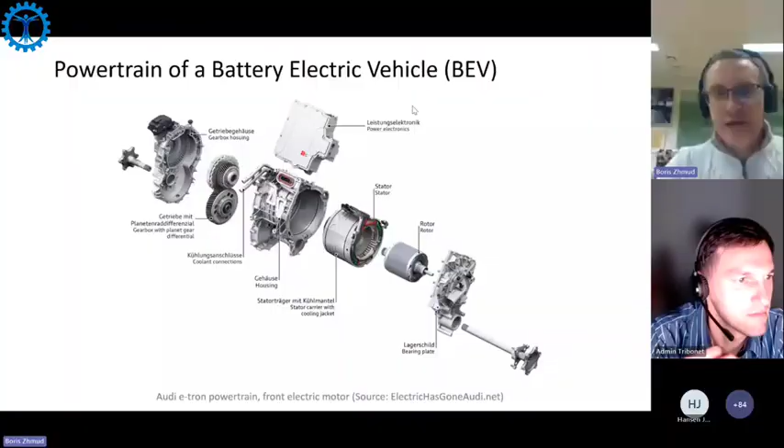When it comes to changes in tribology, tribology is all about loads and speeds and material combinations. You will discover that you have some significant differences. For example, the torque curve for internal combustion engine is dramatically different from the torque curve for an electric motor. For electric motor, you will see usually an area which is called constant torque - you get instant torque already at very low RPM as soon as you start. And basically why it's constant, is because if you make it higher, you will get uncontrolled wheel spin. So very often this constant torque is determined by traction between wheel and ground.

And then you have an area which is called constant power area. In internal combustion engine, the torque curve is always different - it usually will pick up torque, especially if you have turbocharged engines and so on. It would reach maximum, depending on engine configuration, between 2 to 5,000 RPM, and then it would slowly decay after that.

High speeds are used primarily for cost and weight consideration, because you can get a small motor delivering high power. Just imagine a Dremel rotary tool, which can deliver 20,000 RPM. So electric motors can work at very high speed and deliver high power density. Such motors are easier and cheaper to build, requiring less material, and can weigh just 15 kilograms while delivering very impressive torque and power rating.

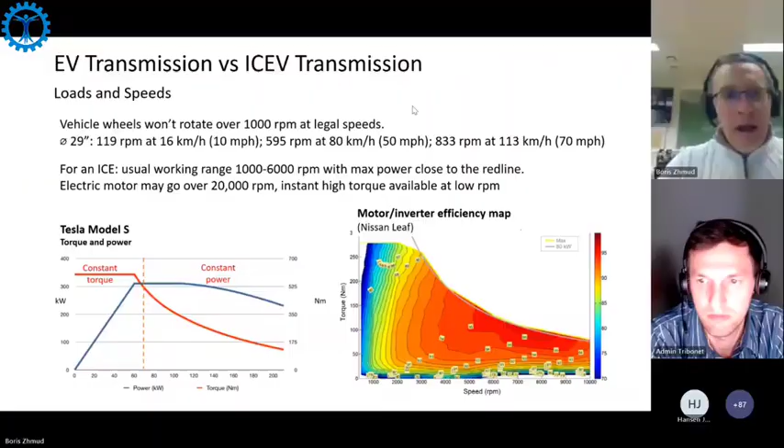It would be very easy to develop such a system if you had only one design. For example, if you used only one-speed e-drive, as initially popularized in different magazines, just a reduction gearbox, and everyone used the same. But that's not how engineering works. You always have a lot of competing concepts, a lot of different hardware solutions, and sometimes people say, okay, we need no clutch.

But if you look at multi-speed gearboxes, they are already in operation. German premium cars use ZF 2-speed transmissions. A year ago, they released 3-speed electric transmissions for passenger cars. In heavy-duty applications, you already have 4-speed transmissions.

If you look back in history, you'll discover that the first automatic transmission came with just 3 speeds. So basically where we are now with electric transmissions looks like the situation with automatic transmissions some 40 years ago. And you'll also know that today automatic transmissions very often have 9 to 10 speeds. So basically we're moving in this direction.

We also have, of course, CVT type transmissions and so on. So basically it's a very broad range of hardware which needs to be addressed. And when you have such a broad range of hardware, there's no universal recipe for how to optimize efficiency, because it's different for each individual design.

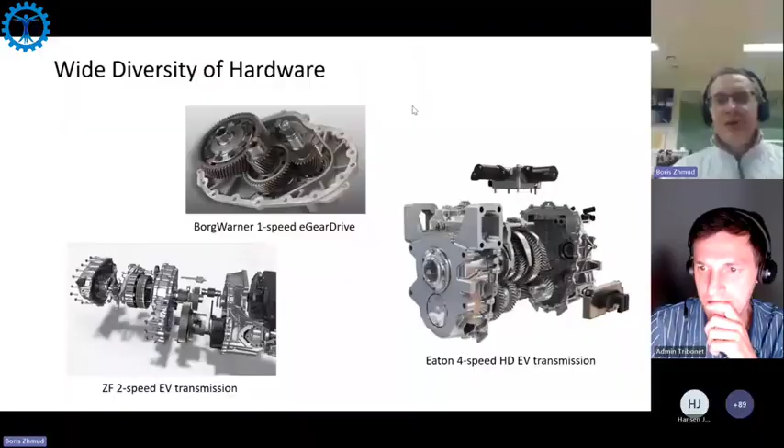When it comes to tribological problems, everything boils down basically to 3 major components: gear tribology, bearings—because gears sit on shafts, and shafts are mounted to housing with bearings—and seals. This is basically the same as it was in traditional transmission design, as it was in automatic transmissions and so on.

Then we add something new: insulating materials, because now we talk about electric motors, high voltage alternating current, and when you get high voltage you always have risk for discharges. You're basically getting close to conditions for dielectric barrier discharge. You can get some very interesting phenomena which are described by plasma chemistry in electrical units.

Those phenomena will affect insulating materials, and those phenomena will also affect transmission fluids. You get a lot of formation of free radicals, you might get some electrochemical reactions, you may get formation of minute quantities of ozone, which is extremely active towards elastomers and so on. But again, tribologically wise, we'll speak about gear tribology, bearings, and seals.

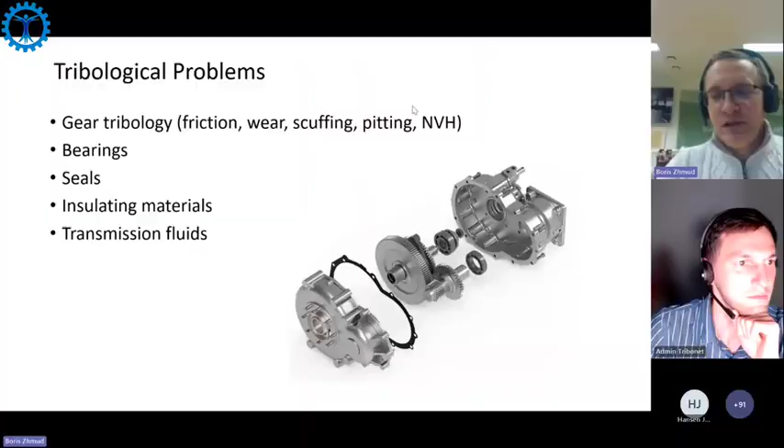For EV bearings, as I said, the biggest difference from orthodox knowledge formed over maybe 200 years before electric vehicles arrived is parasitic currents. Because now, due to shaft voltage, due to the voltage difference between the motor shaft and the frame, you get parasitic discharges. You get a phenomenon called electrically induced bearing damage, or electric polishing, and bearings may be damaged—in fact, severely damaged, which would require total change of the motor.

So to address the electrical damage problem, there are some remedies. The most straightforward one is just to improve bearing insulation.

Either you want current not to go through the bearing, or you want to direct current around the bearing if you cannot just stop it. So you can use, for example, hybrid bearings, which use ceramic elements, ceramic balls, and so on. You can use shaft grounding. In this case, you will just redirect electric current from the bearing to the ground.

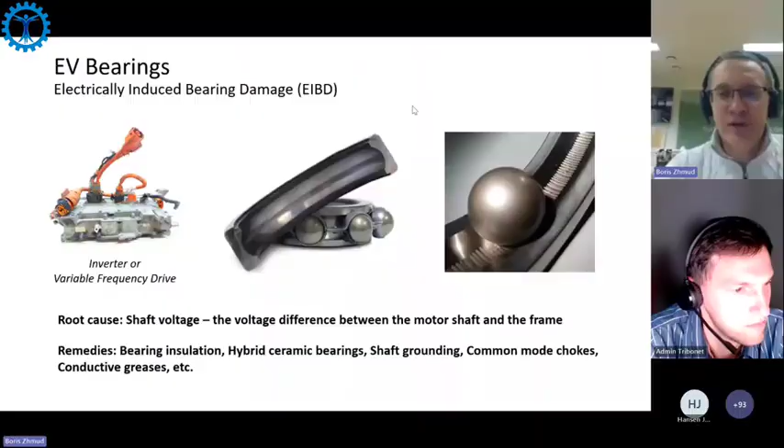You can use, I would say, some electromechanical things like common mode chokes. It's basically you just try to filter parasitic signals. You can use conductive greases and so on.

So when it comes to the seals, actually a lot of problems are totally identical to what you get in conventional vehicles, because many elements in electric vehicles are actually the same as in conventional vehicles when it comes, for example, to chassis and to hydraulic actuators and so on.

But some components are very unique, and unique is a requirement for rapid rotary seals. Electric motor usually runs dry, and it needs to be somehow isolated from the gearbox, which is lubricated by automatic transmission fluid. In this case, you would need some seal in between, and you would require that this seal withstand very high surface speeds, up to 50 meters per second.

It's actually an abnormal speed for some seals, and it requires low friction, because if it has high friction, it will heat so much that it will just melt. So many standard materials will not work. Luckily, we have some material development based on composite, PTFE, copper seals. You have Teflon seals and so on, which work in these conditions.

Then it's also required to have chemical and thermal stability. Because of high power density, you will have heating. So we don't have combustion, but we still have a lot of heat actually in the electric motor and also in electric transmission. Seals are supposed to survive this broad range of operating conditions, from negative temperatures when you start the vehicle in winter to very high temperatures, maybe up to 150 degrees when you run at full power on the highway.

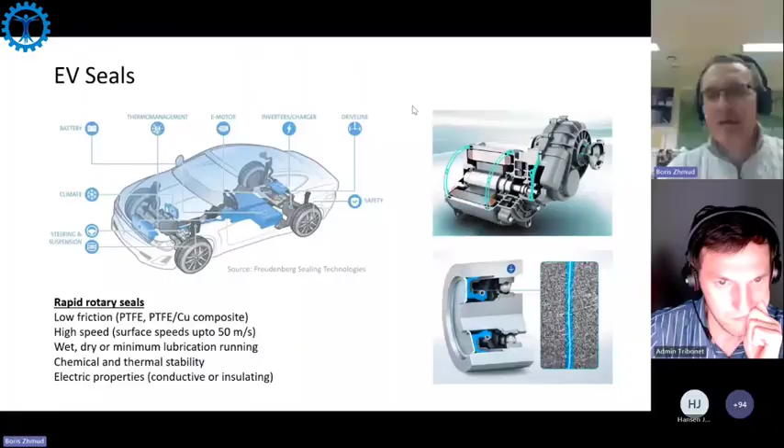Transmission fluids are an inherent component of any kind of EV transmission. Again, you can name some differences versus conventional vehicles, but then the question is, what is really conventional? You know that on the conventional vehicle side, you have over 100 individual OEM specifications for automatic transmission fluids. No mistake, over 100. So you have a handful of products with multi-vehicle approvals. One product can probably match up to 50, maybe different specifications.

It's always a matter of compromise. When you develop a multi-vehicle product, it's not particularly good for each individual design, but it's good enough for a broad range of designs, which may make it extremely easy to deploy.

So you talk about higher input shaft speeds, and again, this is not unknown in past experience. For example, if you look at speeds for older generation Formula One cars, which run up to 20,000 RPM, or some motorcycles and so on, you have actually classical designs with very high input shaft speeds.

You have high torques in classical cars. For example, Koenigsegg developed up to 1,000 Newton meter torque. So you had also alternating stresses in racing applications, drag racing, and so on.

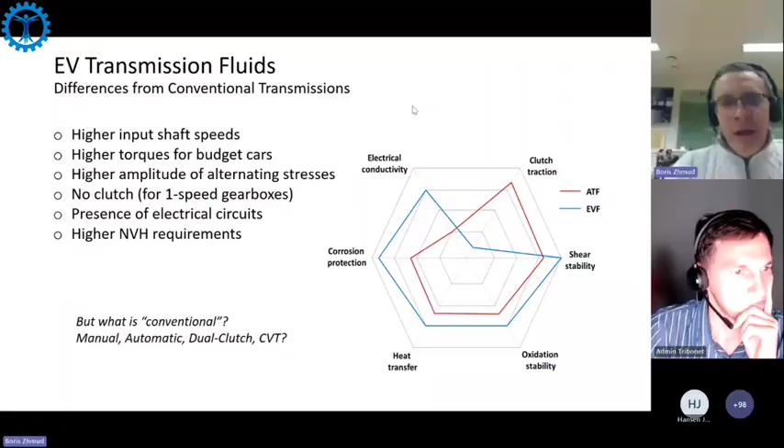Can you use conventional transmission fluids in EV transmissions? Actually, not only you can, but you do. You would be surprised to hear at each conference you attend, people talk about unique fluids for EV transmissions. But actually, if you look at factory fill, nearly all vehicles on the market use standard transmission fluids for EV transmissions.

Here is a table taken from Infineum, so people know what they're talking about, and you can see no matter what kind of transmission you have, CVT, DCT, reduction transmission, you still use conventional ATF fluids. Dexron 6, for example, is used in Tesla, and so on.

So basically, when we talk about uniqueness of EV transmission fluids, it's kind of a cat and mouse development game. Why do people use conventional transmission fluids? Because when you, as a transmission designer, design your transmission, you need to take a fluid which is available on the market. You cannot basically develop your transmission with some hypothetical fluid in mind. And you cannot ever be sure that someone will be able to formulate a fluid with the requirements you want, because that's a totally different art from formulation, and I would say just dreams of an engineer.

So you use a standard transmission fluid, Dexron, Mercon, or whatever. You develop the transmission, and it happens that your transmission works very well with this fluid. So then the uniqueness of EV transmission fluid is actually developing something which will be multi-vehicle. You can see some newcomers, for example, from Afton, which develop fluid that covers multiple applications. But as I say, it's the same

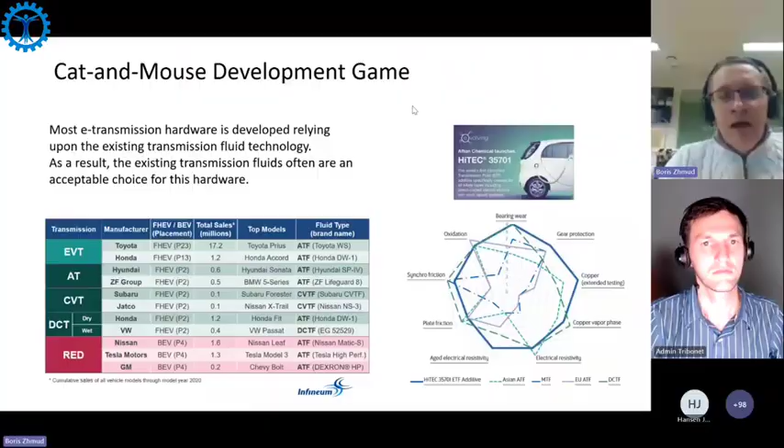A little bit about requirements for gears. We talk about improving quality all the time, continuous development, and you have seen how the quality of automatic transmissions has changed over the years. If you go to exhibitions and see those shiny boxes, they look very, very impressive.

When it comes to EV transmissions, you talk about usually tight dimensional tolerances, and this is done because of requirements for noise reduction. So you want to minimize transmission error. Usually we'll talk about either accuracy grade 6 or sometimes even better. Sometimes we go even to grade 5 for high performance vehicles.

The ability to withstand rated torque - you talk about pretty high torques in EV applications for regular on-road vehicles. In the past, anything which delivered over 400 Newton meters would be considered a power performance vehicle, but now, more or less each electric vehicle will deliver you over 400 Newton meters in torque.

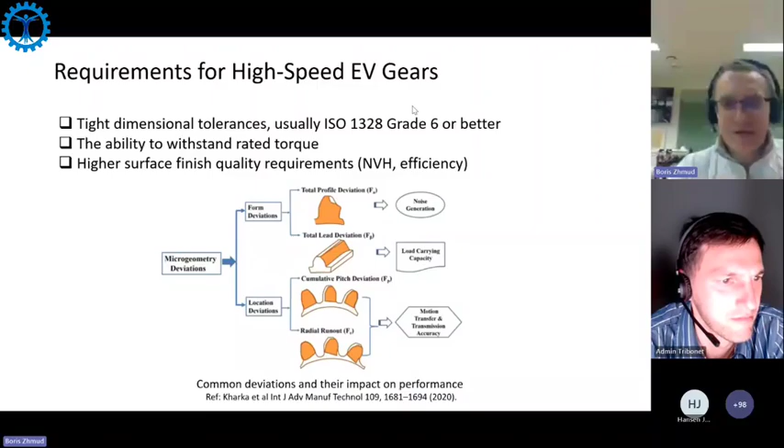And higher surface finish requirements, because when you go to higher tolerances, you would also like to improve surface finish. As I say, it's all ways to minimize transmission error.

Mass finishing processes is one of the processes getting increased interest when it comes to application in high-speed electric transmissions. Our company in Sweden, TriboNet, we work with developing a very special mechano-chemical process, which is used for enhancing the surface. And the unique side of

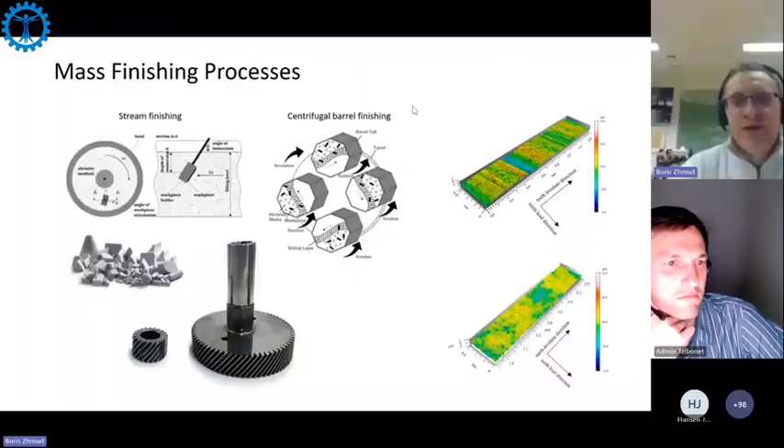the mechano-chemical process is that unlike conventional processes which deal only with surface roughness, we have a triad of effects. Instead of one effect related to surface roughness, we have 3 different effects playing together. We modify surface roughness profile, we generate compressive stresses, and we provide tribofilm priming. And this has a pretty significant difference for performance, because when you have tribofilm priming, you automatically improve scuffing resistance.

And scuffing resistance is very important if you want to deploy transmission fluids with a low level of anti-scuffing additives. Think about low sulfur content. For example, if you would use dual clutch transmission fluid, it usually has 0.2% sulfur versus 2% in GL5 lubricant.

And then compressive stresses - conventional abrasive processes are very often used to remove compressive stresses from the grinding operation, because gear grinding also produces compressive stresses. But in mechano-chemical finishing, we actually generate compressive stresses too, just with a different tensor, which would improve performance in terms of rolling fatigue and micro-pitting. So these are the real differences we see from mechano-chemical process compared to conventional mechanical process.

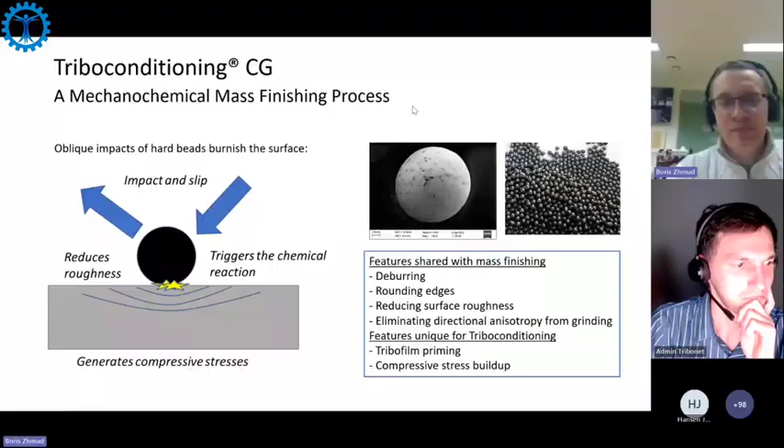The process itself looks to some extent like shot peening, except that we don't have shots - they fly at lower velocity. Basically the surface is bombarded by small ceramic balls, 1 to 3 millimeters, which produce some impact, some burnishing effect, and they also trigger a tribochemical reaction to deposit tribofilm on the surface of the component.

First and foremost effect is on surface roughness and surface waviness. This effect is actually not unique for mechano-chemical finishing - the same effect can be achieved by conventional super finishing, the only difference being that you'd require a multi-step process. We get reduction in amplitude roughness, reduction in gradient roughness - meaning slopes of asperities are reduced - and also some reduction in waviness, which is positive for noise excitation. But again, when it comes to modification of the surface roughness profile, it's not unique to mechano-chemical process. It's a positive side of it, but can be achieved by other means.

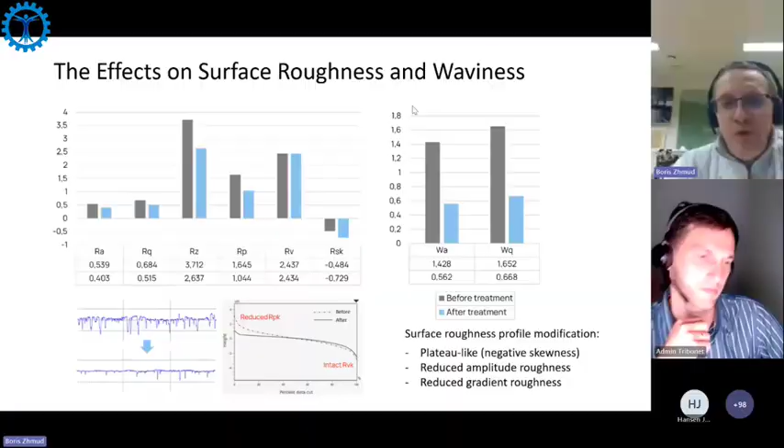What is unique for mechano-chemical process is actually tribofilm priming. And with tribofilm priming, you would usually improve scuffing resistance. I will show it later.

To understand deeper what's going on, we rely on gear tribology simulation. Here I'm lucky to have cooperation with really knowledgeable people from the US and Italy. We work in collaboration with EnginSoft from Italy and Xtrapid from the US. We use different models, from thermal elastohydrodynamic models to more macroscopic meshless simulations of the whole appliance.

What we try to do is build the whole simulation chain, where you bring together experimental results. Experimental results are used to calibrate the digital twin, and digital twin simulations are used to simulate your actual appliance. So we go from basic tests, which are used for calibration of your model. From this calibration, you basically have a lot of parameters which you need to enter - parameters for lubricants, for example.

To find those parameters, they are not part of specifications - you need to get experimental research to find those data. We use those data as fitting parameters for the model. Then we can validate the model by using FZG testing, and after the model is successfully validated, we go to full appliance simulation - we can simulate basically the whole gearbox.

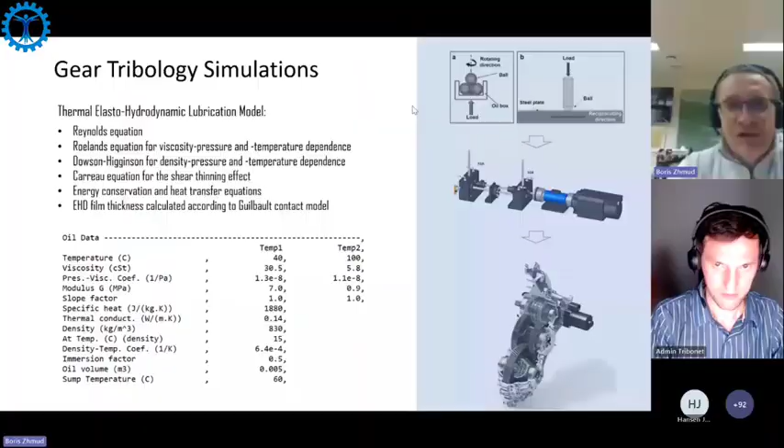So this is just an example of input you provide - very simple spur gears for FZG testing. We produce one gear which is representative of surface roughness of conventional ground gears, roughness 0.3 micron, RZ would be around 3 micron in this case, with very little skewness.

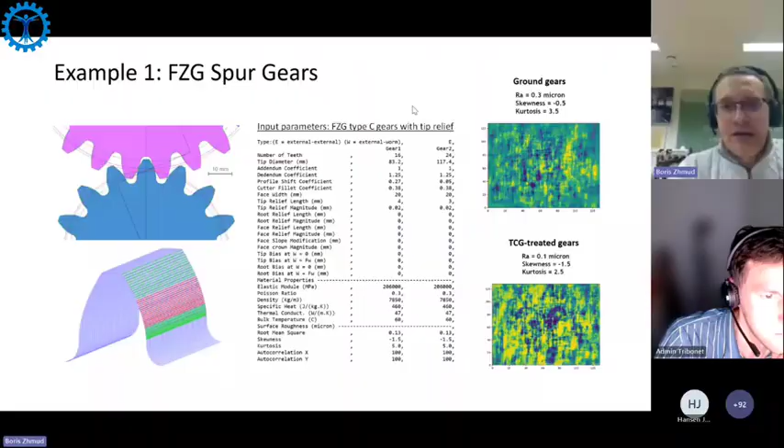Then we go to tribo-conditioned gears. A tribo-conditioned gear is really a gear which is processed by our mechano-chemical process. It has much more negative skewness, meaning the surface is more like a plateau-like surface, and roughness is also decreased. If we look at the results of these two gears in simulation, you discover that friction is getting lower - asperity contact ratio is getting lower when you get mechanochemically finished gears.

So you get overall more robust design - reduction in friction shear, improved lubricant film strength, which means improved efficiency and lower wear. The better the lubricant film integrity, the less wear you're going to experience.

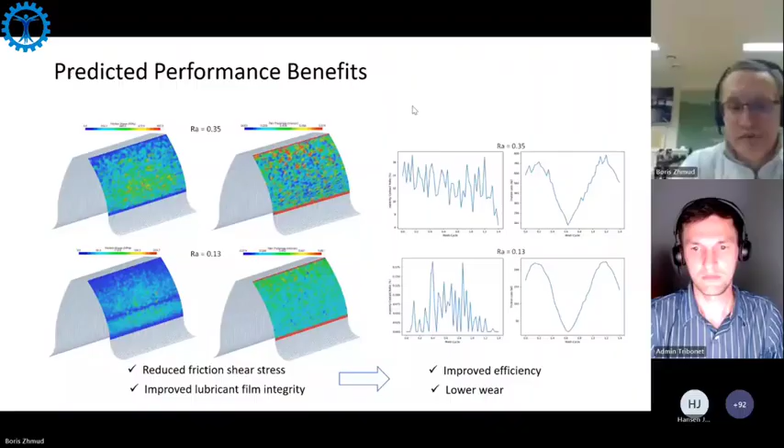We also use more advanced rig tests like FZG tests to look at scuffing resistance, because you always try to downsize components, but you cannot downsize them infinitely. The electric motor is already very small, but if you go, for example, to the gearbox and want to make it light, you'd go for smaller gears - but smaller gears will always be loaded more, and when loaded more, at some point they will suffer scuffing. And when scuffing occurs, you're no longer concerned about efficiency because you have a much bigger problem to address.

Dimensioning of gears is a very important topic, and luckily with modern computer-aided design tools, you can get properly good dimensioning for gears, for bearings, for everything already at the design stage. You develop things which are pretty good from the first trial, but they always require some empirical tweaking.

Empirical tweaking is very often related to heat management, to lubrication, to choice of lubricant, to choice of additivation, and to addressing some long-term endurance issues which may not be discovered instantly but come after one or two years in operation.

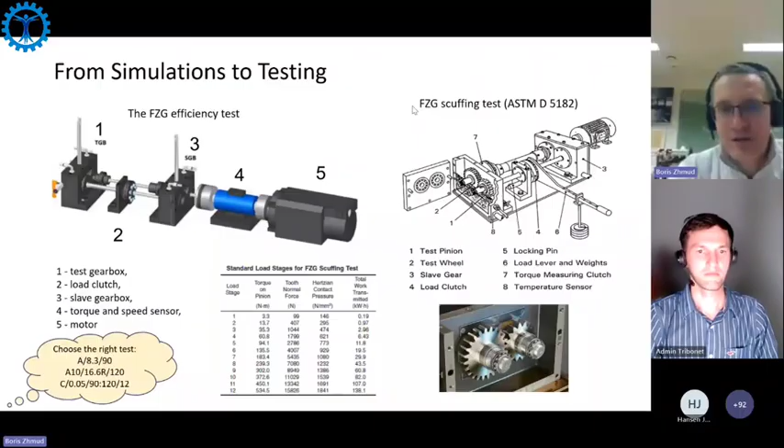So we try to do as much as possible from rig tests to get an idea how one or another type of surface finish will perform in real life application. It's also important to keep in mind there is a broad range of tools. For example, if you visit Munich Technical University, you'll discover they have several dozen different FZG rigs, far beyond the standard center distance of 91.5 — rigs for high speed, low speed, three-shaft testing, and so on.

So what do we see in this type of test? First, a big difference between gears produced by conventional grinding. Even though we talk about conventional grinding, there are already high performance solutions on the market — some Japanese machines for precision gear grinding can deliver accuracy class 5 without honing, without anything. But still, if you look at the performance of gears coming from grinding versus gears which were ground and super-finished, you'll discover two remarkable changes.

First, response to running in, because you can never develop fully conformal running-in of components during manufacture — you can only deliver some degree of approximation. It turns out that gears which are super-finished are much closer to running condition than gears which are just ground.

If you look at data showing efficiency versus pitch line velocity for ground gears and super-finished gears, you'll see that the improvement in efficiency due to running-in is bigger for ground gears than for super-finished gears. For a super-finished gear, efficiency after running-in versus before is almost unchanged. For ground gears, efficiency significantly increases after the running-in process.

It's also important to keep in mind the overall difference in efficiency after running-in — for example, take efficiency at 8.3 meters per second. You can see efficiency after running-in is always higher for super-finished gears than for ground gears. So there's a positive effect of super-finishing on the running-in process, which is remarkable for many reasons: you generate less particulate matter, less debris into the lubricant, the lubricant stays in good condition longer, and you also get efficiency improvement over the lifetime of the component.

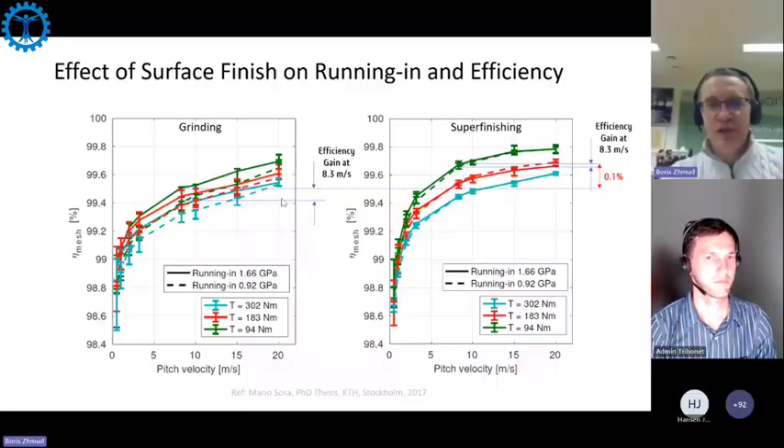So what is the difference with mechano-chemical finishing? We still basically get the same efficiency improvement as from super-finishing, or sometimes a little bit better. So what's the big difference? As I said, mechano-chemical finishing leads to improvement in scuffing performance due to tribofilm priming.

On this graph I'll show scuffing performance of two different finishes with two different lubricants. One lubricant is a fully formulated axle lubricant with GL5, API GL5 specification, which will go all the way up to loading stage 14 without failure. On the right-hand side, the dark gray area shows super-finished surfaces. On the left-hand side, you see how conventional ground surfaces behave.

If you go to additive-free oil — the low pillars refer to additive-free oil with no sulfur whatsoever — it will fail at the same load stage, stage 5, no matter if you have ground gears or super-finished gears. Whether ground or super-finished, they all fail at stage 5. For fully additivated GL5 oil, they all pass stage 14 without failure.

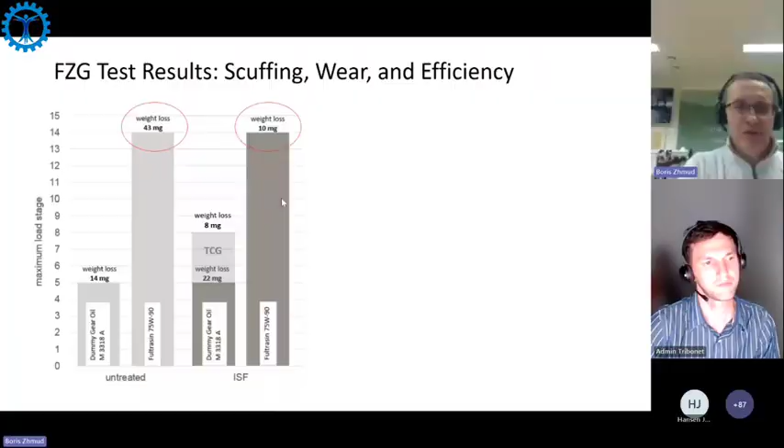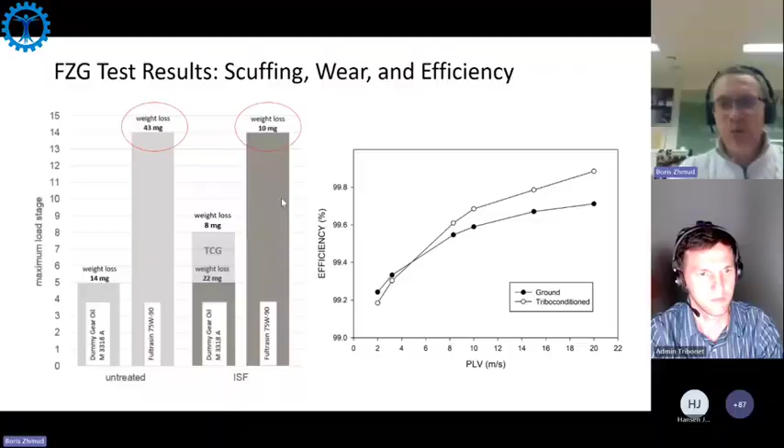So what is the advantage of mechano-chemical finishing? With mechano-chemical finishing, you actually get a higher failure stage already with oil that has no additive. So mechano-chemical finishing essentially brings some elements of running-in into the manufacturing stage, making the gear more resistant to scuffing than a gear that was just super-finished, when there's no anti-scuff additive in the lubricant. Efficiency-wise, mechano-chemically finished and super-finished gears have comparable performance improvement — sometimes mechano-chemically finished gears give a slight improvement over conventional super-finishing.

Another important factor is the influence of lubricant, and this is a topic I really love because it relates closely to my past in lubricant development.

In this particular study, we compared different viscosity grades, but not only different viscosity grades, also different base oil compositions. We moved from group 2, hydrotreated API group 2 base oil, to fully synthetic polyalpha-olefin based. As you can guess from viscosity, 3.5 is actually Exxon base oil. What was used in this case is fully PAO based.

You will see that with fully synthetic lubricant and lower viscosity, you get lower total losses in the FZG test. You would also expect to get lower losses in your actual transmissions. You get a consistent effect at lower load stage 5 and at higher load stage 9 in this particular case. You will see that lower viscosity means lower losses, which is good and justifies the reason to move toward lower viscosity fluids.

You know that water-borne formulations are now of great interest, and basically they come from some past experience with cutting fluids. It's remarkable, but basically water-borne formulations - glycol water formulations - work very well in some high-speed applications.

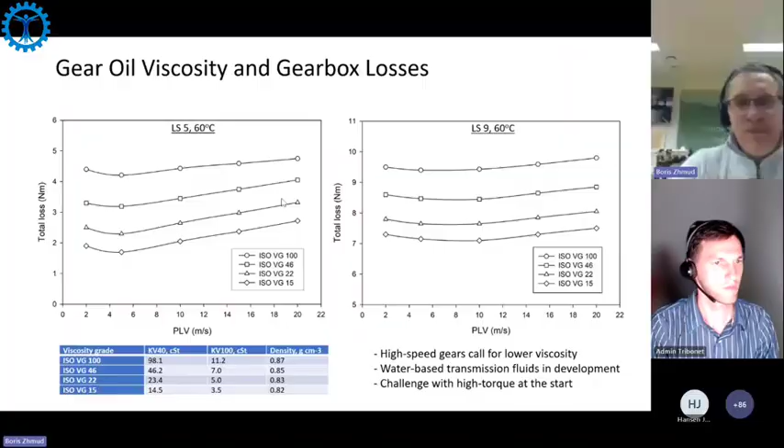So you basically derive bearing and churning losses by running the rig without loading. Then you deduce bearing and churning losses from total losses, and the difference between total and bearing and churning is actually gear meshing losses. Gear meshing losses go down with increasing pitch line velocity.

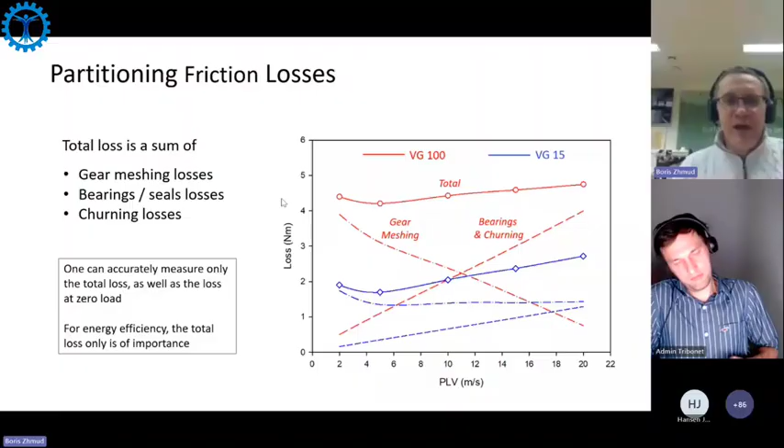This really describes the challenge of electric transmission design. It would be extremely easy to get a transmission which is very robust if the gearbox ran at the same speed, at the same high speed. But unfortunately, it has to start at low speed at high load. When you have low speed and high load, you need high viscosity lubricant. But when you have high speed and low load, you would do better with low viscosity lubricant. So you have to find a compromise which adapts to those self-conflicting limits.

Of course, simulations are very useful for understanding this phenomenon. We don't at this point have the capacity to measure helical gears, but we can do simulation for helical gears. Actually, in Germany, institutions already have rigs for working with low loss helical gears. Such rigs exist, but we don't have access to them. I would be very interested to work with people if someone from the audience has access to such rigs.

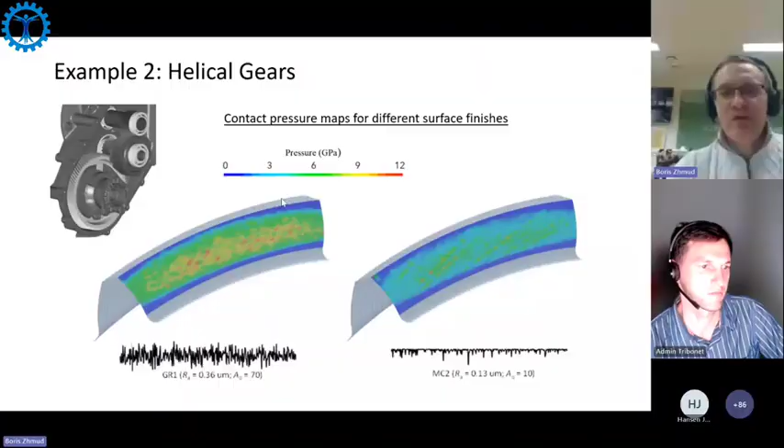We can calculate differences in contact pressure maps for different surface finishes. You will see that with mechano-chemically finished components, you always have a more uniform distribution of stress over the surface, which minimizes pitting damage over the long term and so on.

We also try to go from micro simulation, thermal elastohydrodynamic simulation, to macro simulation, and this is where all the expertise of this partner works. I'm extremely happy about our contact with this company - they have really the world's most expertise in the simulation field.

So we can go to the whole simulation of the whole appliance, not only a simulation of your contact line in gear meshing, but you can simulate the whole appliance. You can simulate how your lubricant will move in the gears. You can simulate temperature maps, stress maps, and so on. It's a very powerful simulation tool.

Even more important, those simulations are usually verified or validated by real experiments with real fluids, which shows that simulations have very good predictive power. It's pretty remarkable how much progress was made on the simulation side over the last decades due to increases in computer power.

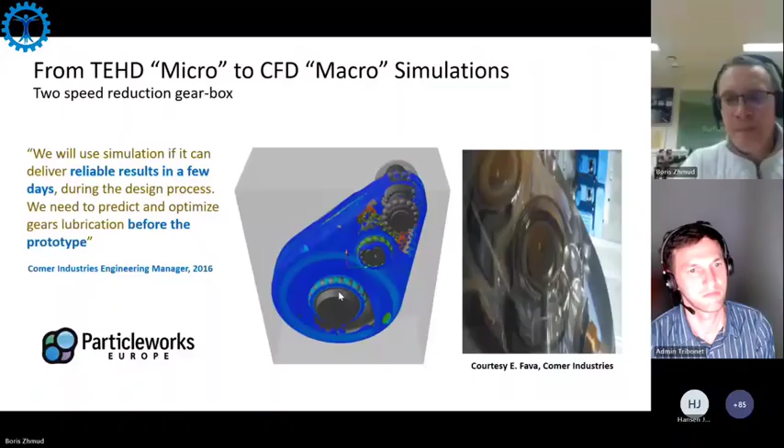I will show an example of two limiting cases, to see how useful simulations can be. You can consider the same graph I showed in the beginning, the Nissan Leaf total efficiency map, inverter motor efficiency map. We will look at low speed, high load condition, when you just start the vehicle and press the gas pedal. So you go to high torque, but still have low speed on the gears.

And then another limit, when you actually go to high speed, low load conditions. I chose high speed, low load because I wanted to get the average maximum contact pressure not extremely different, relatively close between the first number, maximum contact pressure at low speed, and the second number, maximum contact pressure at high speed.

So what became significantly different are the churning figures. You will see that at high speed, you get an enormous increase in churning losses. You have a lot of energy dissipated just by moving and pumping lubricant through the gearbox. Churning losses increase by a factor of 30 by moving to high speed.

When you get such high churning losses, you will of course have an increase in temperature of your gearbox, because you also transmit higher power through it, plus the churning losses give you higher temperature in the gearbox. So you would need to improve cooling. And what do you do to improve cooling?

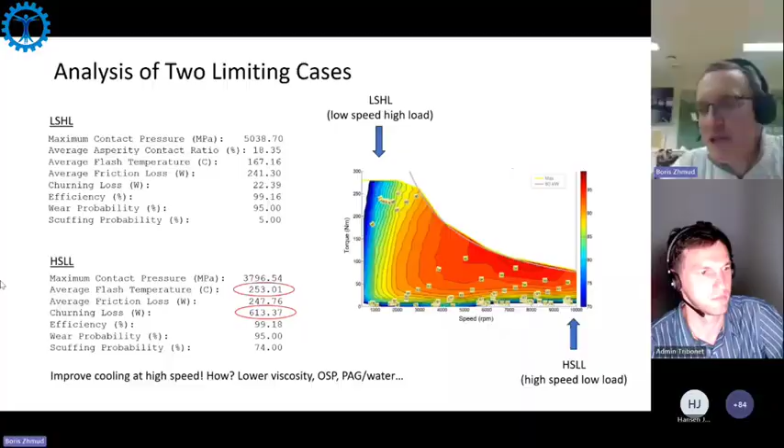Last but not least, it's not only about how much heat the fluid can absorb, but also how much heat you remove from the fluid. You would need to add some coolers, some heat exchangers, which cool the fluid in the system. So we talk about a total system approach as a necessity. You cannot talk just about tribology alone; you need to talk about the whole unit and look at the unit design.

So it's interesting to look at the effect of roughness, speed, velocity, and load. This is actually very simple, where basic tribology comes through. You talk about the Hersey number, which is the product of velocity multiplied by viscosity divided by load, as a representation of film thickness. If you go to higher velocity, you can actually reduce viscosity, because you will still have sufficient film thickness.

And you talk about the lambda ratio, the ratio between lubricant film thickness and composite roughness. When you go to a smoother surface, you can work with a thinner lubricant film. This is an easy explanation of why mechano-chemically smooth surfaces shine: they work very well at high speed operation, but also prevent scuffing at low speed, high load operation. That's what was supported by simulation, and also supported by a real test.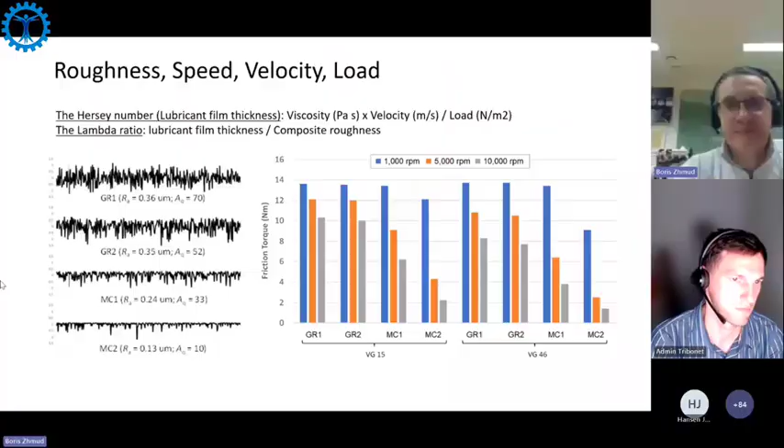It's also very important to keep in mind that there is no silver bullet. There's no technology which addresses all possible application scenarios, no additive which will play magic. You always have to think about each individual case and find smart solutions.

For example, imagine a situation when the gearbox is heavily loaded and you have a risk of scuffing. What would you do? You should actually go to higher viscosity lubricants as the first remedy, not to lower viscosity, but to higher viscosity. Low speed, heavily loaded gearbox, you need to increase viscosity and deploy an anti-scuff additive, sulfurized olefins, sulfurized fatty acids, aminophosphates, or whatever.

On the other hand, if you have another problem, gearbox overheating at high-speed operation, you need to go to lower viscosity lubricant or higher thermal conductivity lubricant. You would probably need to add spray jet or jet lubrication, force lubrication, to more efficiently drive away heat from the rubbing parts. And you would need to add heat exchangers, because even if you cool it inside, if the fluid accumulates all the heat, it will start boiling and you will get burned transmission fluid.

Most important is that additives do not simply add together. You cannot just add two additives and hope that they will work together. Very often, one additive will kill another. For example, you can go to a glycol-based formulation, and then some of your anti-scuff additives stop working. So you can actually get more problems with scuffing by moving to glycol-based formulations than you had with paraffinic base oils.

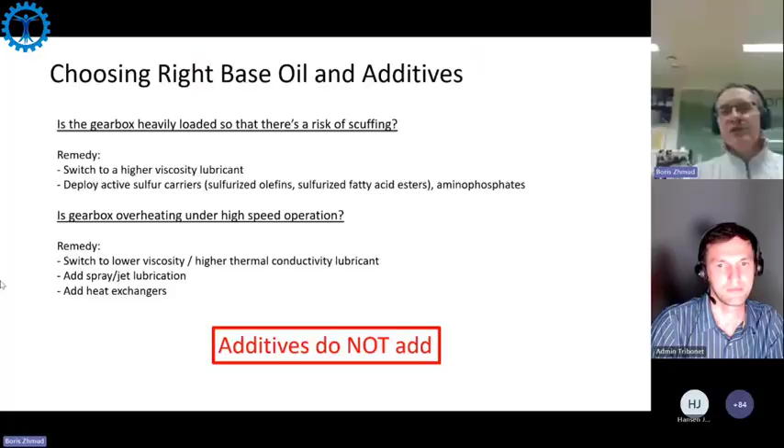Gear accuracy and surface finish is another factor where you need to find balance, because we usually talk about gear accuracy, mounting accuracy, and lubrication. These three factors should always be considered together. Don't expect that you can get some low quality, low accuracy gear, do some magic surface treatment, and improve its performance. You would always need to improve accuracy, improve mounting accuracy, and review the lubrication scenario to achieve basic performance.

High accuracy gears benefit a lot from super finishing or mechano-chemical finishing. If you have low accuracy gears, there's actually no point going for anything different from just conventional grinding. And low accuracy gears actually benefit from using a high level of sulfur in transmission fluids, because they will have a lot of chemical wear during the running-in stage.

It's very important to keep in mind that you need to consider three factors together: gear accuracy, mounting accuracy, and lubrication. For example, I can take a very expensive gear with a very high accuracy grade, super finish it to the best possible result, and then introduce a mounting error, putting in gears which are not properly aligned. This application will not work, because this type of gear will not be able to run together since they're already super finished. So you basically increase cost and undermine performance. This happens very often, unfortunately, in real life applications, as I can judge from my practice.

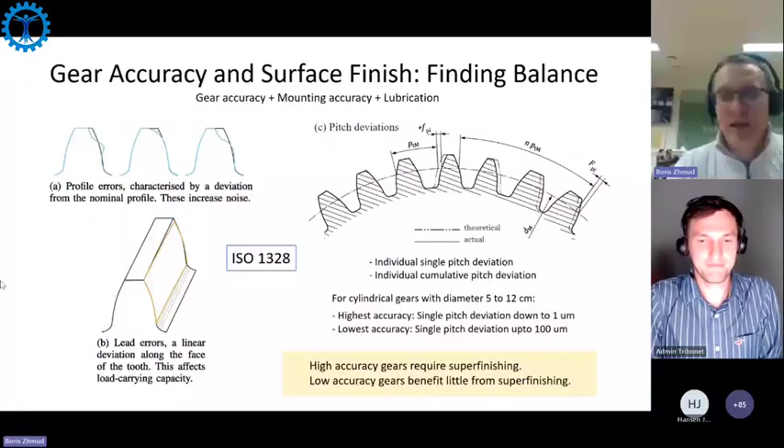The last point I would like to touch on is that people should apply critical thinking. When I come to critical thinking, I mean, we are intelligent, we are engineers, we should talk with numbers, with real numbers, not about emotions.

So why do people talk about improvement of transmission efficiency? The most common argument you hear from salespeople is that it will extend the range. Let's calculate how much we can extend the range by improving efficiency of electric transmission. Average battery electric vehicles consume around 200 watt-hours per kilometer in the WLTP cycle, and total energy loss in transmissions is around 10 watt-hours per kilometer.

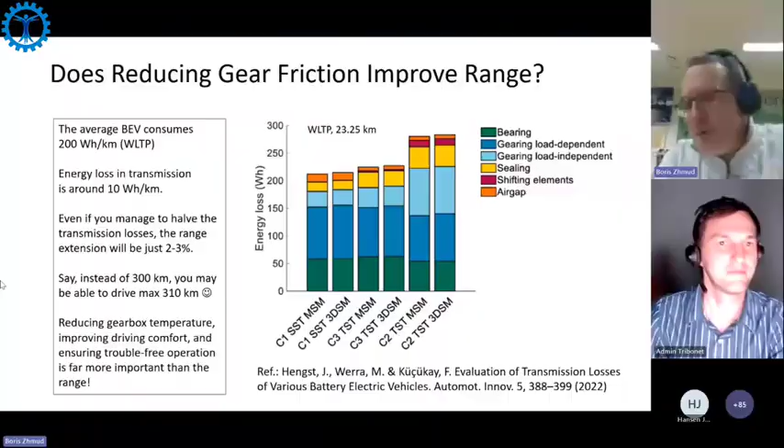To end my presentation, I would like to show that we are not only talking and testing, but we actually managed to get some of our components into real vehicles and demonstrate their performance when it comes to our mechano-chemical surface finishing methods.

For example, our gears were successfully tested in a Tesla Model S by AVL, in high-speed drive with standard speeds up to 30,000 RPM. So it's actually very high speeds, close to the highest feasible in the field at this point. This limitation comes down to bearing performance, because it's very difficult to get higher speeds than that.

But the gears managed to withstand this abuse, you can say, without overheating. This also implied some trimming of the whole lubrication management system, but the most important thing is that the total system was designed and it worked.

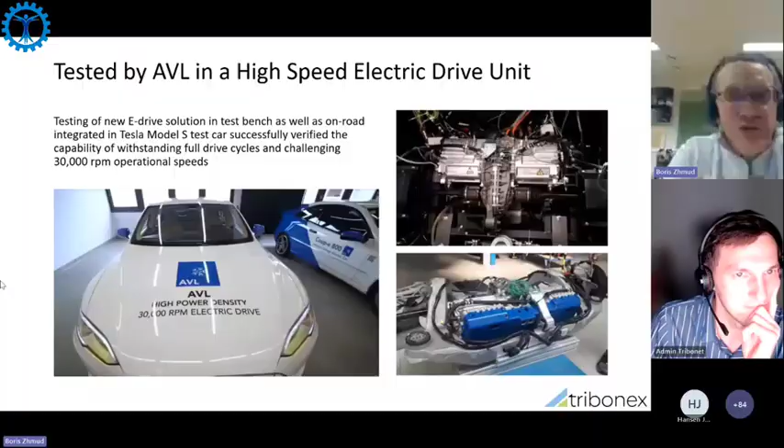As a conclusion, I would say basically the same thing as always, advancing in my years working with internal combustion engines: a total system approach is essential for understanding electric powertrain tribology. You cannot just expect magic from adding some additive or some finishing method and so on. You need to look at the whole system, find weak links, and address those weak links so that they work together. Hardware design and lubricant coolant properties must be carefully matched.

Other than that, you can say that ultra-low viscosity synthetic fluids appear to be a better fit for high-speed transmissions, and this is supported both by simulation and real test results. High-speed gear drives pose higher demands on gear accuracy and surface finish quality.

And finally, last but not least, mechano-chemical surface finishing opens really new ways to optimizing tribology of high-speed EV drives, and it applies to gears, bearings, and seals. This technology is already in production, and it was already successfully validated in field tests. So again, if you have interest to collaborate with us, you would be very welcome to contact me. Thank you for your attention.

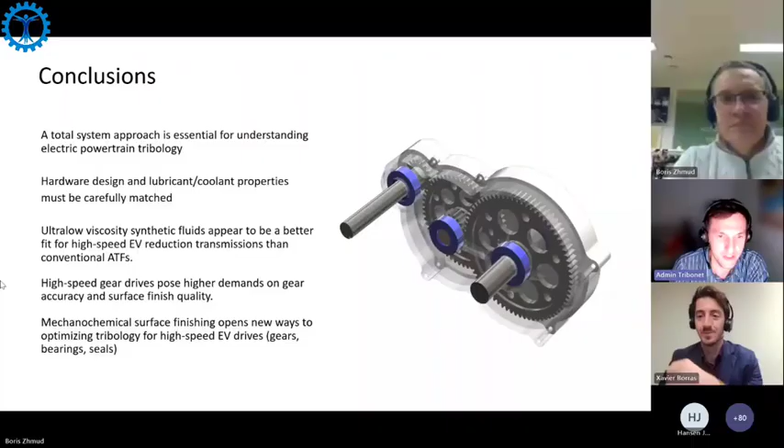I wanted to ask you the following: I always thought that in EVs there is no transmission, but it appears that there are transmissions. I'm wondering how many EVs do we expect to have transmissions, or what part of all EVs have a transmission?

I would say you were obviously misled by this marketing propaganda, which was based on first experience with Tesla. When people talk about the first Tesla, there was a popular joke that Tesla is actually a Walmart trolley with an electric motor on it. So Tesla was a very simple design, but that was not necessarily a bad thing—it was also a good thing. But if you want a vehicle that will deliver driving pleasure, that will combine good acceleration with very high top speed and so on, you would require a multi-speed transmission.

For example, the Porsche Taycan has a 2-speed transmission. I would expect increased use of multi-speed transmissions the same way as it was done with conventional internal combustion engines, which started with automatic transmissions with just 3 gears. Even with bicycles, if you're cycling sometimes, you would say that in most cases 3 gears is enough. From my cycling experience, 3 gears is enough, but you see that actually you get sometimes 21 or more gears on bicycles. So it's basically always a question of what is needed: driving pleasure, comfort, and efficiency.